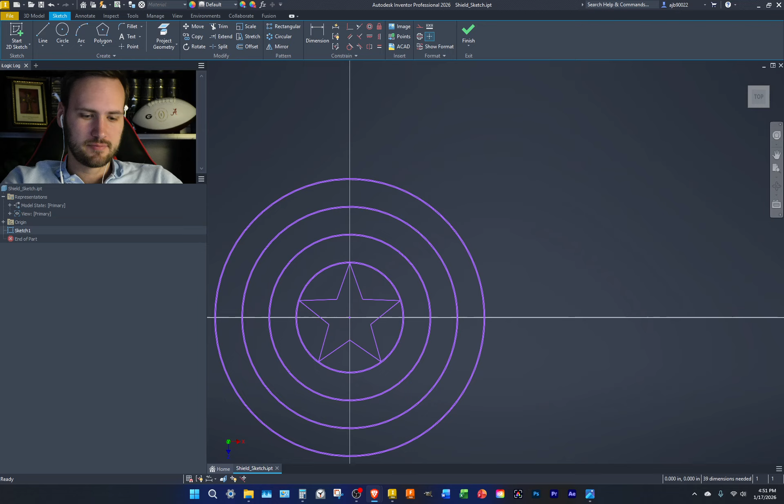Metal armor thickness. Let's see, I think metal chest armor thickness. So for historical reenactment, for modern ballistics, historical medieval armor typically range from 1 millimeter to 1.5 millimeters on average, with thicker sections up to 3 millimeters on the cuirass, chest plate, and helmet.

Let's see. How thick is a medieval buckler shield? Here's a good image of a buckler shield. Save image as, save that to the list. But now, how thick is it? Between 8 millimeters and 16 millimeters. Is that accurate? Doesn't sound too accurate. Let's see.

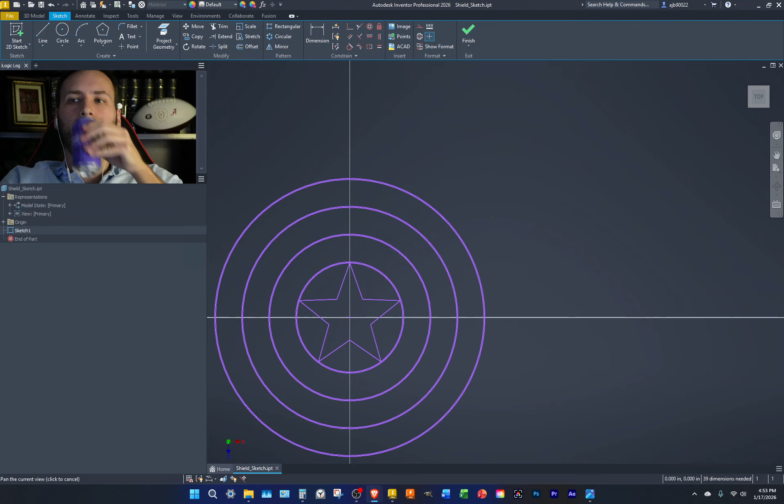Let's see, how thick was a metal buckler shield? Alright, couldn't have been much thicker, I don't think. Alright, so 1.2 to 2 millimeters in thickness. So about 16 to 14 gauge.

Let's see, millimeter to inches. So there's about 0.039 to 0.078. Let's see, what is gauge to inches?

All right, here, gauge inch to millimeter conversion chart. So let's see, was it 14 and 16? Yeah, 14 gauge to 16 gauge. This doesn't feel right, it's like the wrong gauge chart. All right.

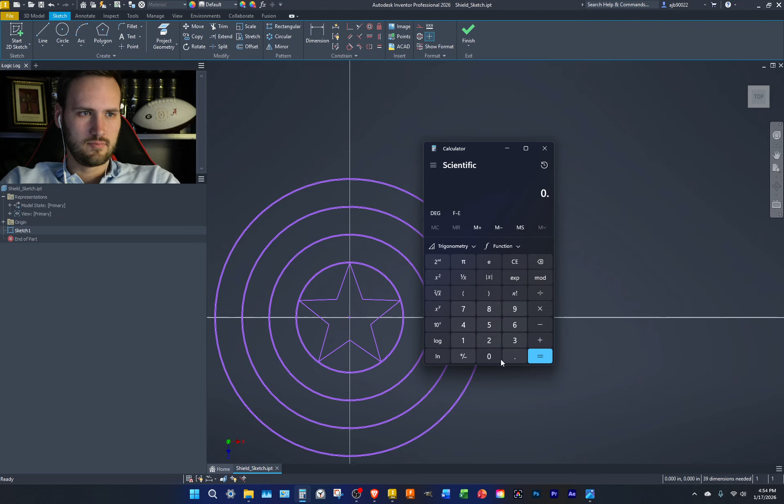Let's see, point oh, so see what is close to that. Okay, let's try this, I like doing things in eighths or sixteenths. So that's a sixteenth plus 0.015625, 0.078. Oh, that's pretty accurate to what 2 millimeters is, just under. All right, let's go with that thickness, 0.078125.

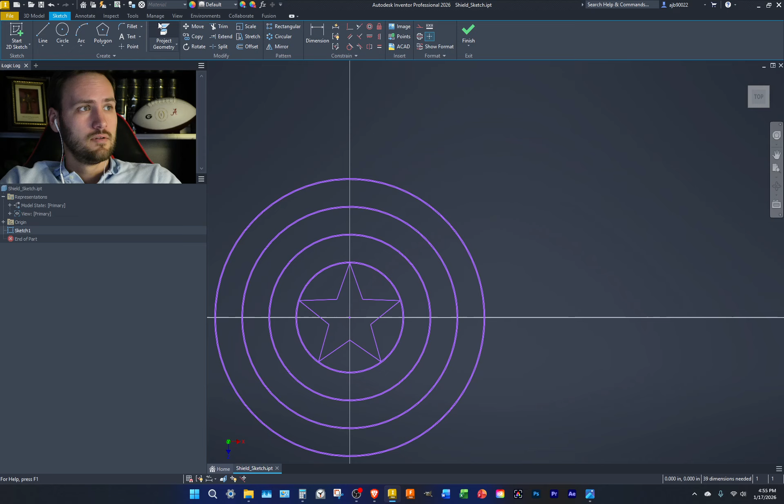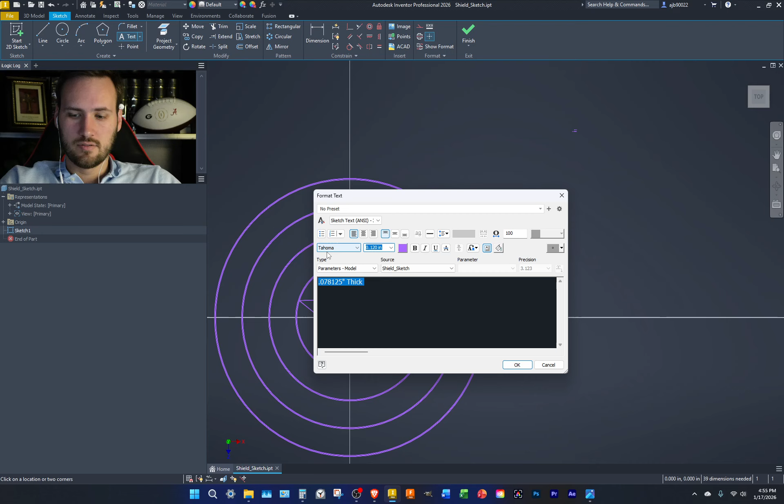All right, let's type this in. Inches. So that thick. Change this to 3. And of course it's upside down. Cancel. Escape. There we go.

All right, now let's see, so that means if you were to roll it, what does a cross section of rolled metal look like? Cross section of rolled steel, hammer rolled steel. I'm guessing because it's expanding and contracting at the same time, it's gonna get thinner. I don't know if I can find an image of that though.

Is there a cross section of steel armor? Must be someone who's cut it in half, right? Not what I'm looking for. I guess what I'm trying to do, I could show you all. Let's see, I'm trying to gauge this roll right here on the edges.

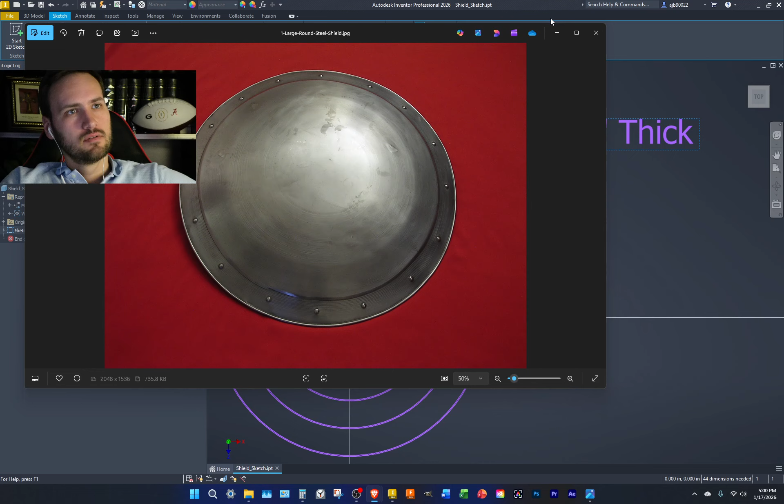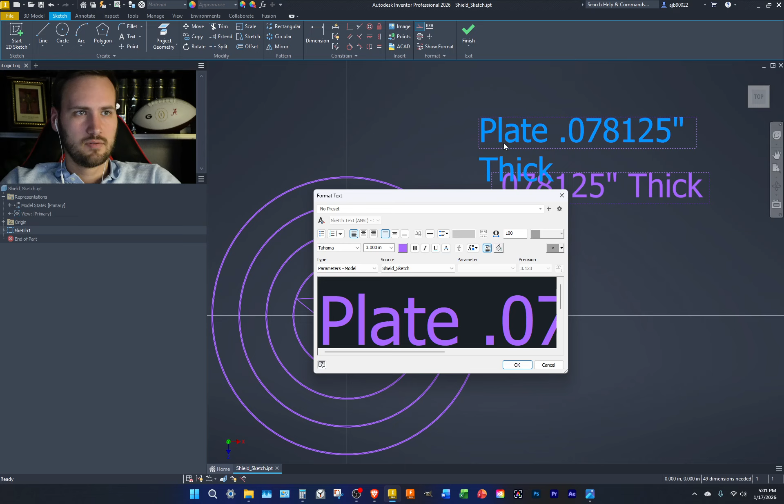All right, at least we have something to go with, so let's go with that. All right, where is it? Let's copy this. Okay, let's type in plate. Okay, I don't need to add 'thick' at the end, just do this. Okay, all right, plate is there.

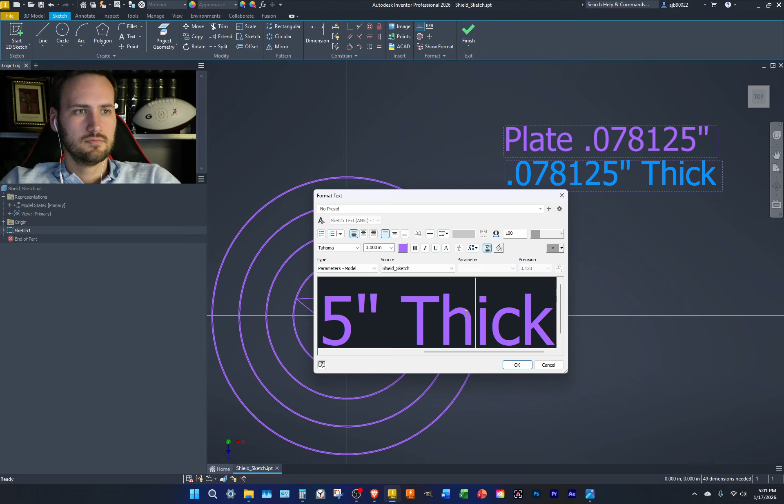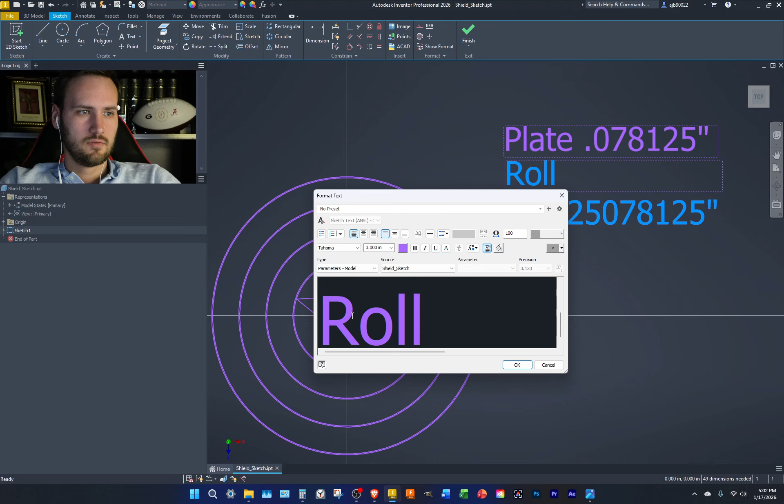All right, that means roll. All right, looks like we're gonna have to come up with something in between. Times 2. All right, 0.15625. Okay, well let's go ahead and add the 0. Okay, all right, so 2. Okay, plus 0.078125. 0.234375. Okay.

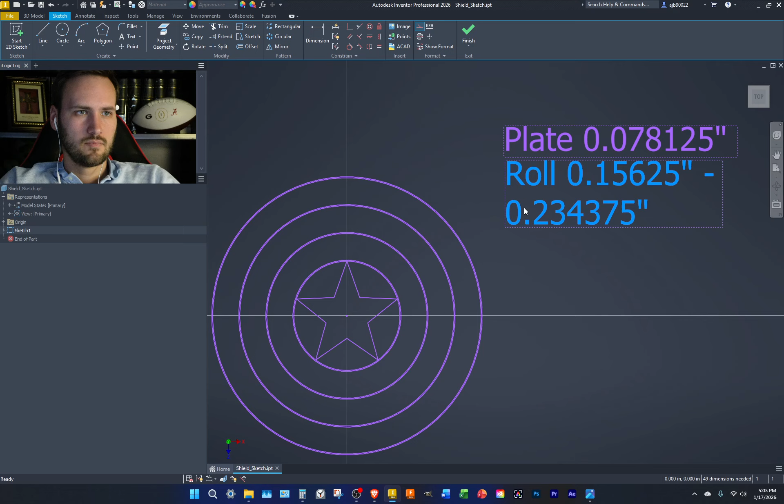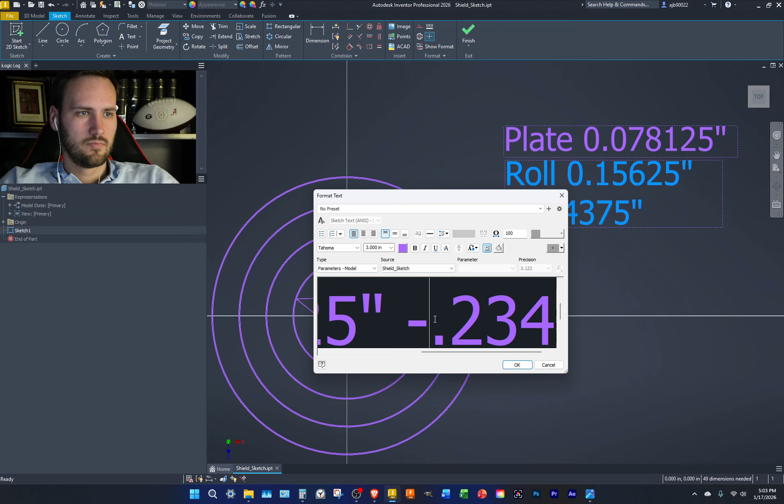Does that change anything? Nope. All right. Ah, come on, where's the 0?

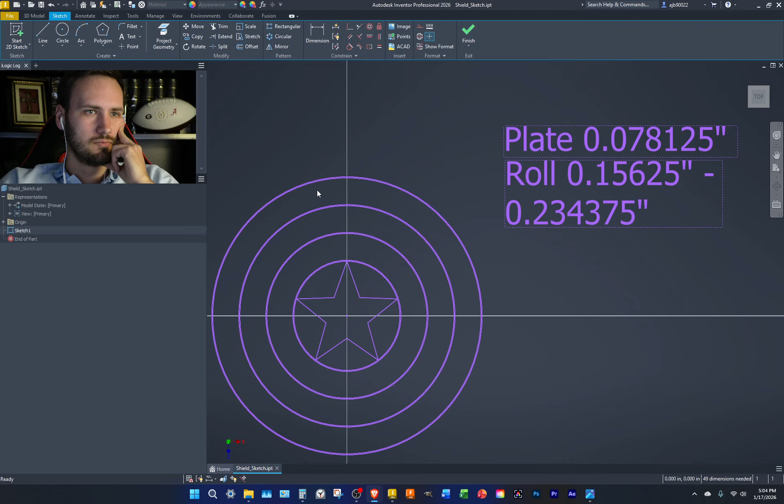So now we need to figure out the question of whether this would be overlaid shield after shield after shield, or a buckler shield and then strip of metal, strip of metal, strip of metal. You know what I mean? It's a question of what would be easier for them to do.

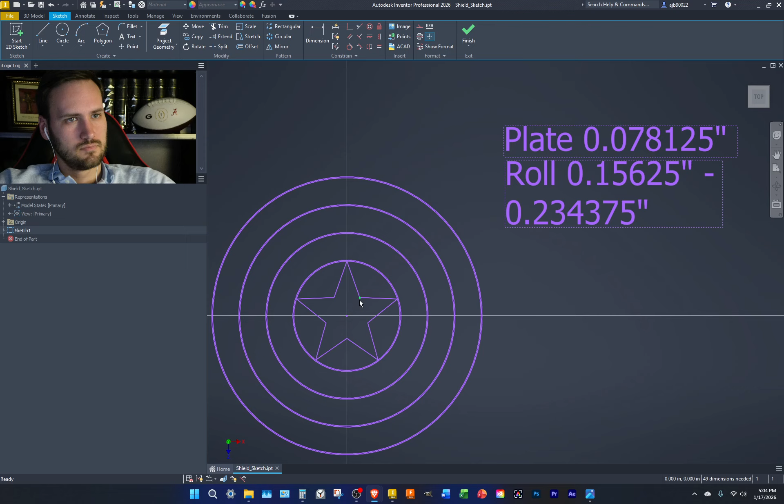I guess we could always do both and see which one looks better. All right, let's call that finished for now. Let's go ahead and work on the other plane. All right, let's hide this.

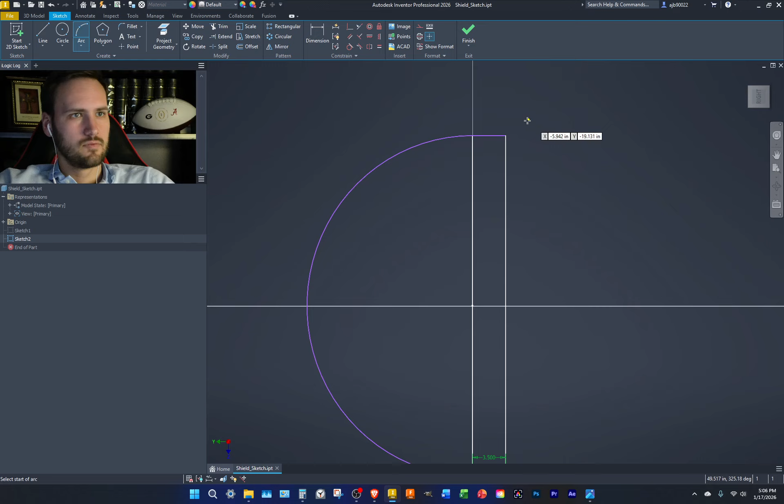Now we need to figure out how much of an arc we're not gonna have. I guess it could start off—this is the standard measure of what the rings are. So what if we tried making the thickness of the shield the same? That actually looks pretty good. So just as the rings are 3.5 inches thick, we make the actual shield curve at 3.5 inches. Actually, it looks good. What do y'all think?

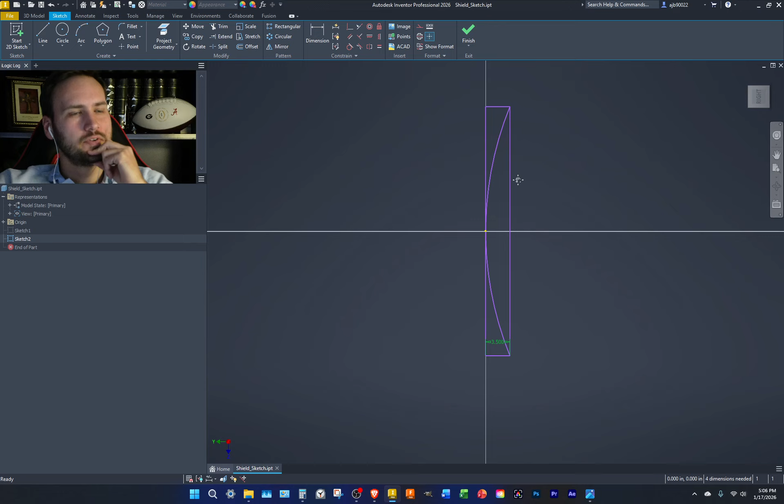I wonder if they actually use that measurement for the shield. So let's do this. Where's the center point? There.

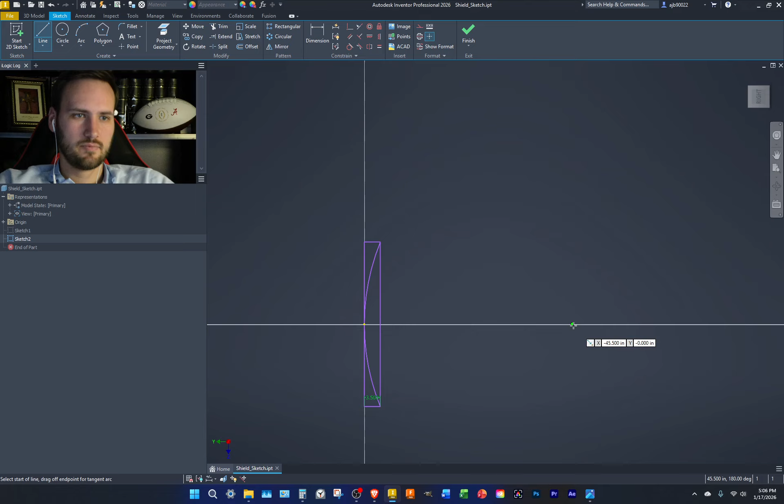The interesting part about this is, do we go— I guess we would go about that, we would say go, because we could do 3.5 inches in that direction and cut across. Or we could base it off of the degree. So what degree is this?

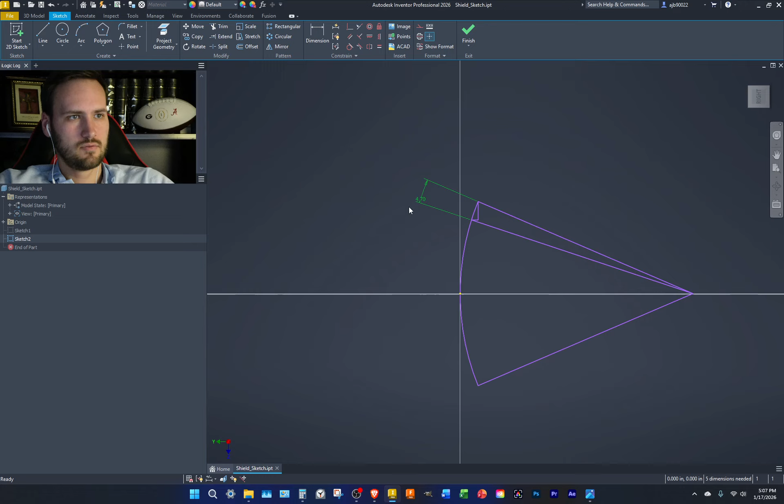Let's take this, go here. So this is 4.6, or basically 4.7. What is this, 45? This is almost 45. Which means we could do it this way instead.

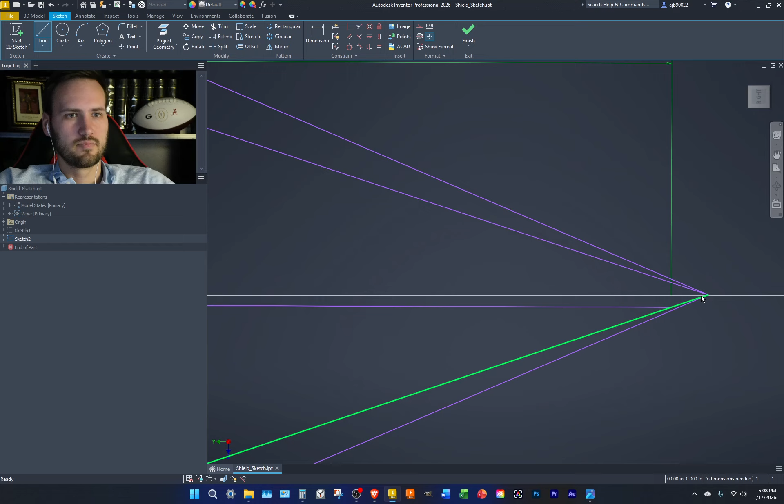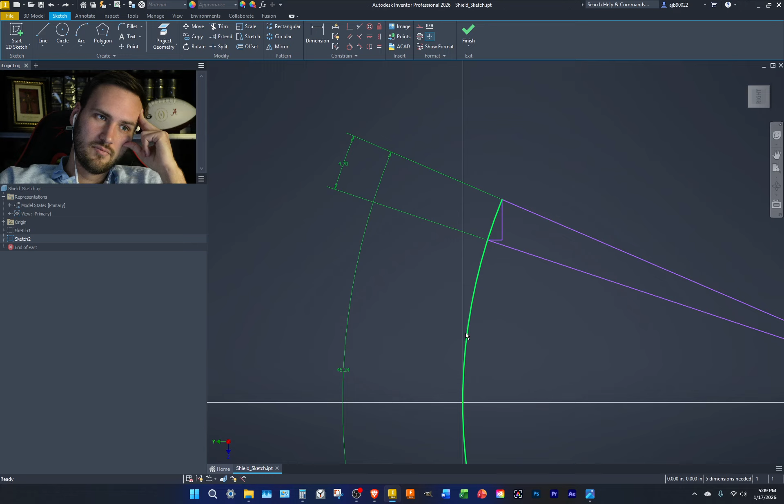Decisions, but this is an arbitrary number, I suppose. That's 45.24, that's interesting. So if we did— ah, crap, undo that. Because the interesting thing is if we go this way and step it how it's being done right now, each of these would technically be different heights, because the arc is shifting. It'd be small, but it'd still be different.

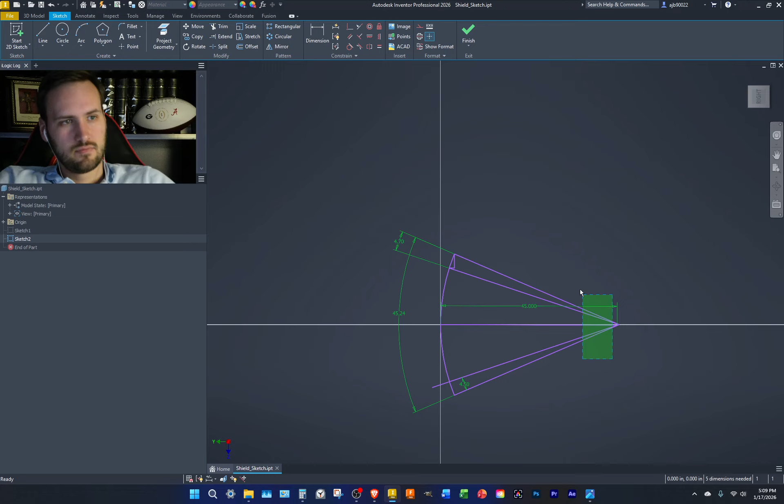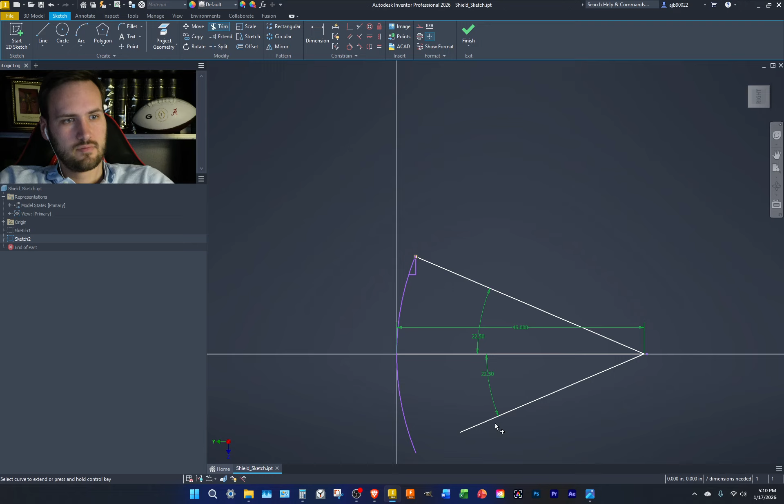So I'm kind of inclined to do it this way. Let's get rid of this, let's make that 45. Maybe it's 22.5—make that 22.5. There and there, so this should be 45 now, right? Whoops, let's go back in, go here. So yeah, so that's 45.

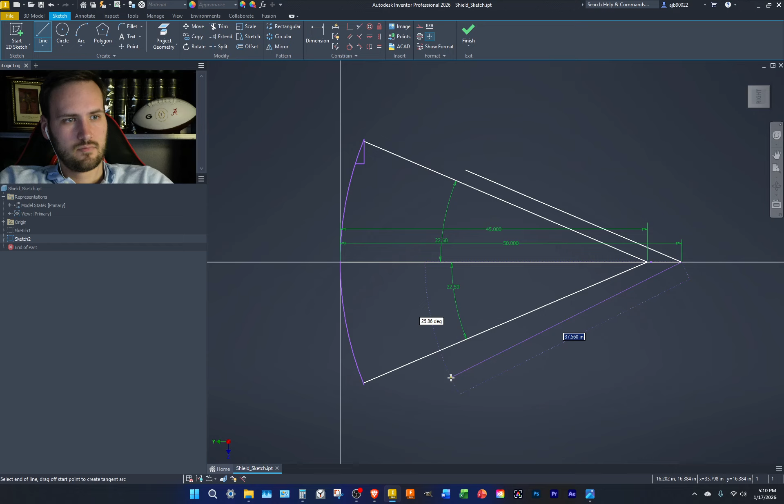All right, what happens if we make it go to 50? How big does the shield become? Really? Alright, take those two points—37. So we got a shield that's basically 38 inches, or a shield that's about 34.425.

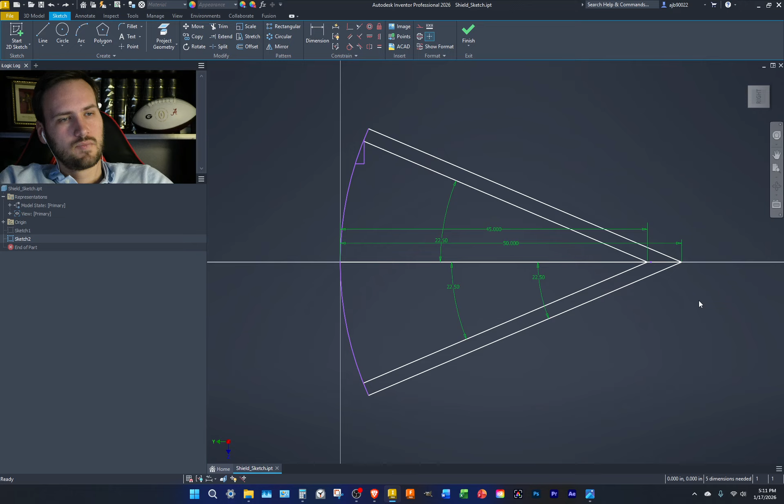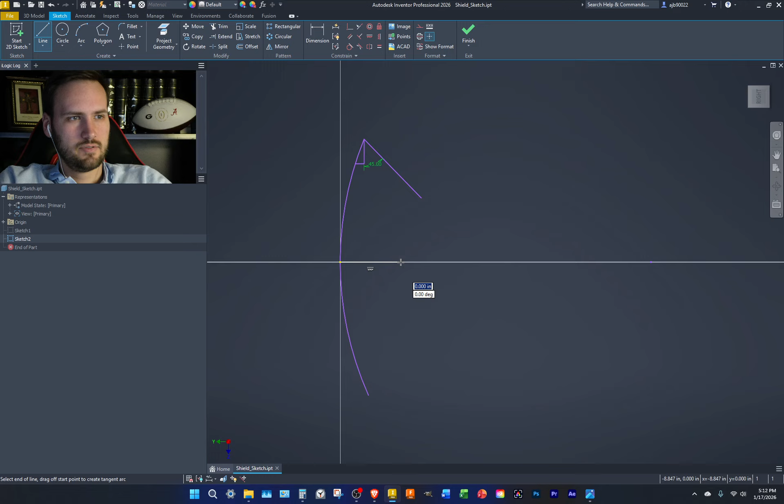I don't know which one I prefer, because we're no longer going to get a perfect 35 there then. Unless—get rid of that. What angle is this? It's like, so that's 45 there. So I'm guessing this is 35 now, right? So that's 35. Alright, I'm just gonna see what this would look like. It's 4.5.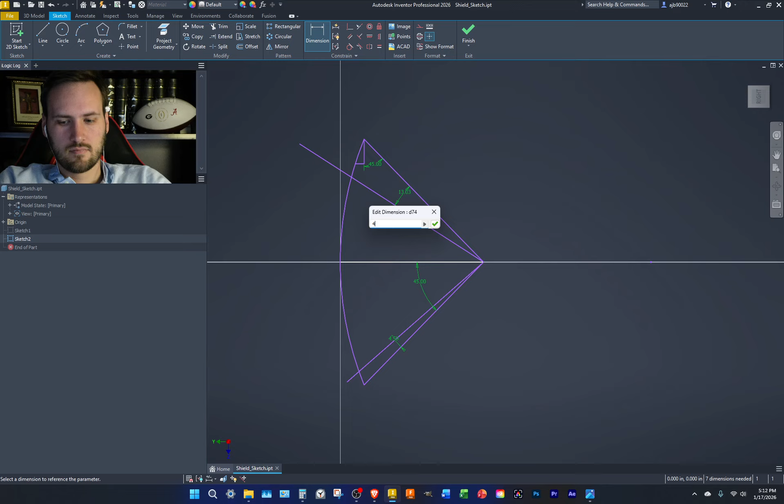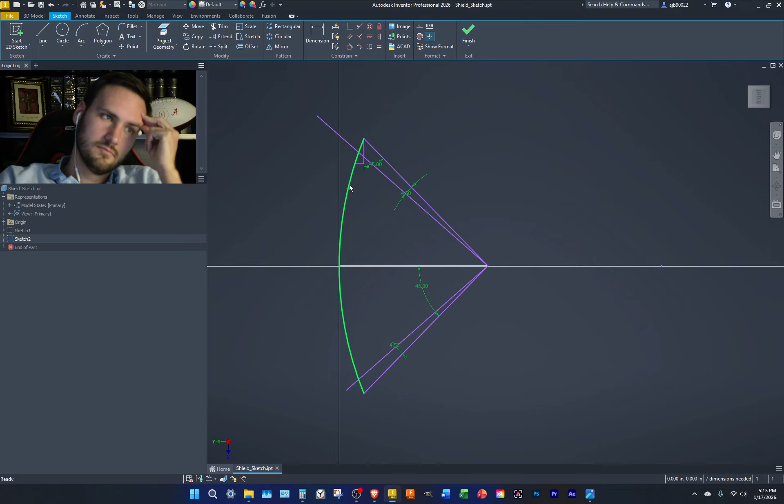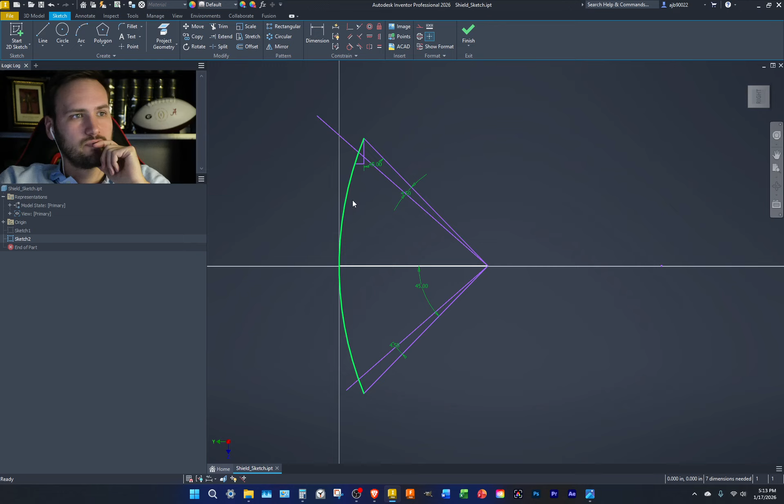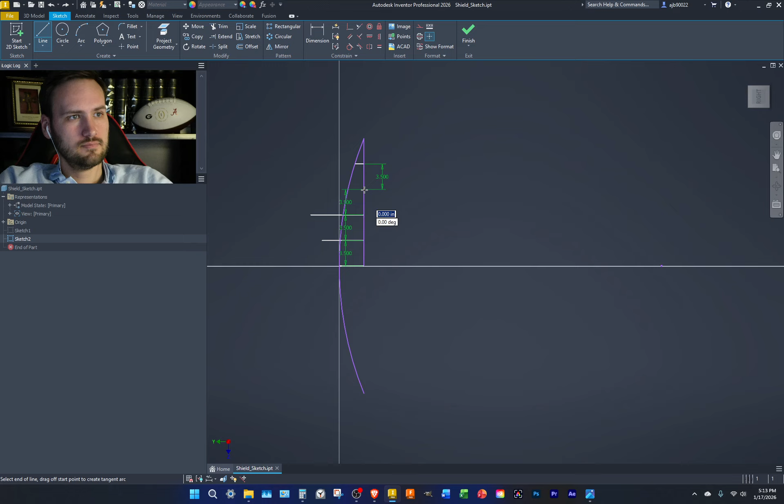Probably overthinking this, to be honest. I'm just not a fan of how— so let's go back to what we were doing before. So that's what's set up now. Problem is, technically, these aren't the same lengths. I guess it doesn't necessarily matter either, I guess.

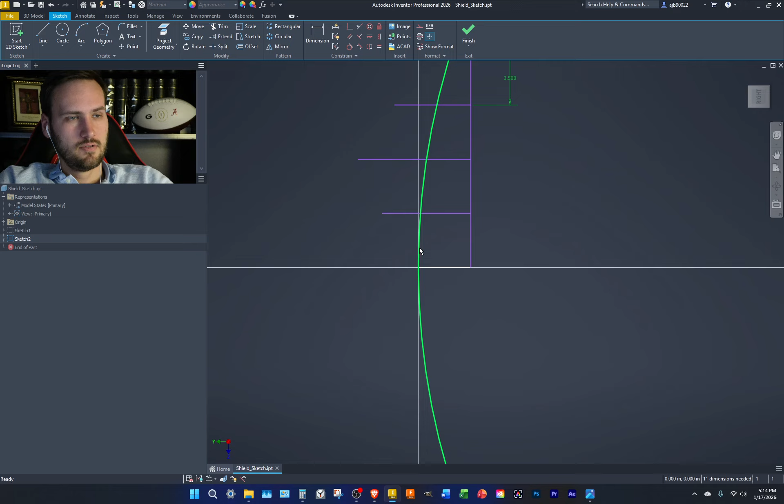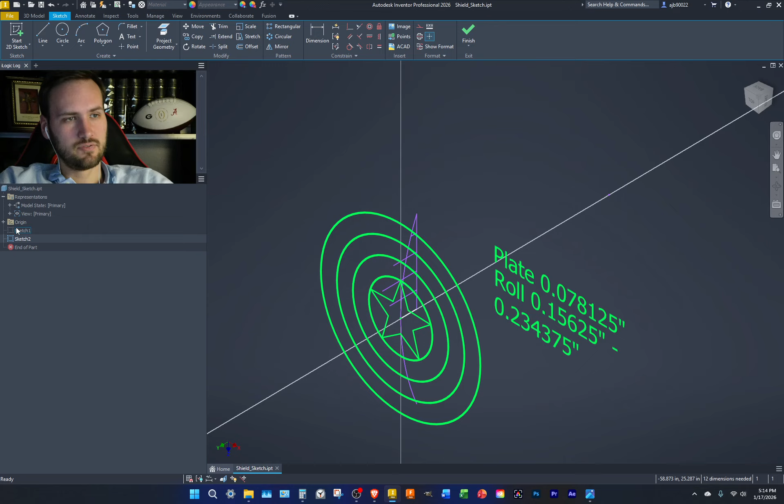Alright, let's just go with what we were going to do before. So what was the roll that we had listed before? Roll 0.15625. I think we do a roll of 3 times the initial, because that allows it to roll back into itself. So let's try that out.

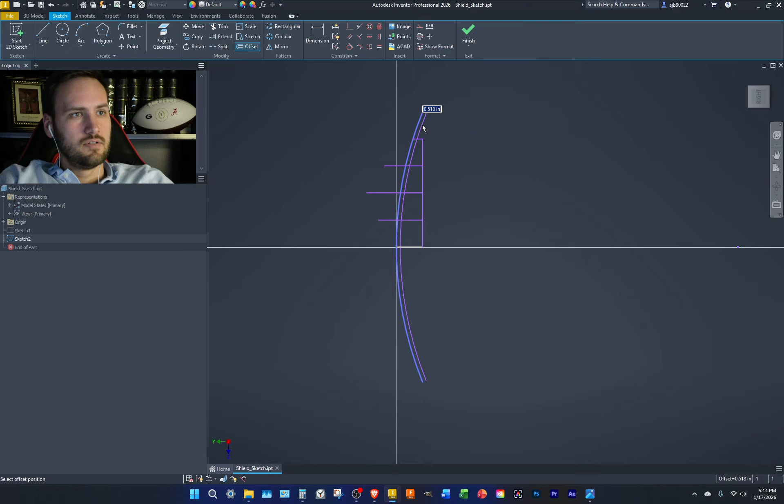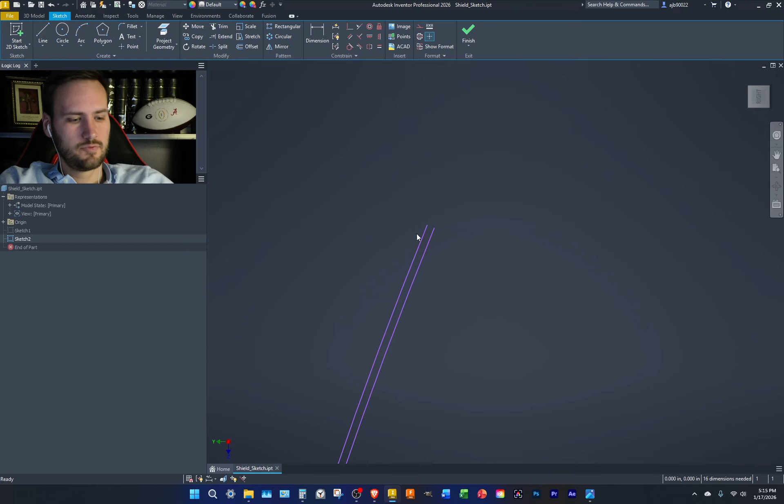So sticking to thickness, get rid of that. Let's do an offset of 0.078125. There we go. I guess. Take this, 0.078125. 0.078125. Take that, cap this here.

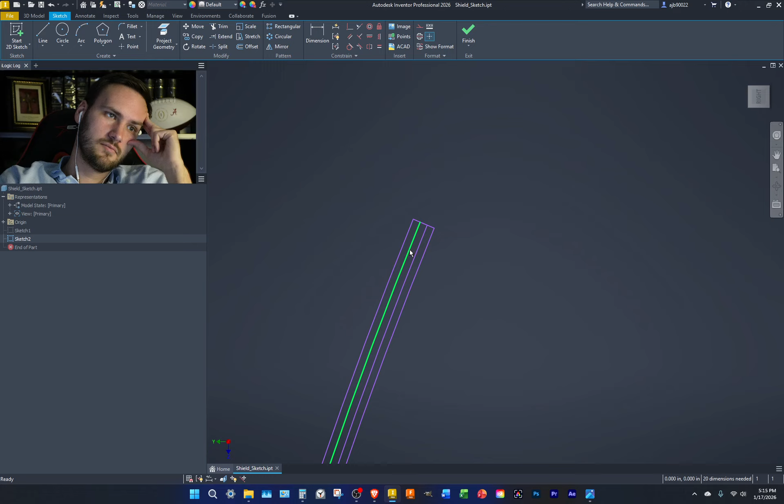So if this curves around, let's try this. I can't touch that, okay. So it's gonna have to go from a bigger circle to a smaller circle. So what is this? Not what I want to do. 0.15625—so if I fill this to 0.15625, there. I'm gonna have to offset this then.

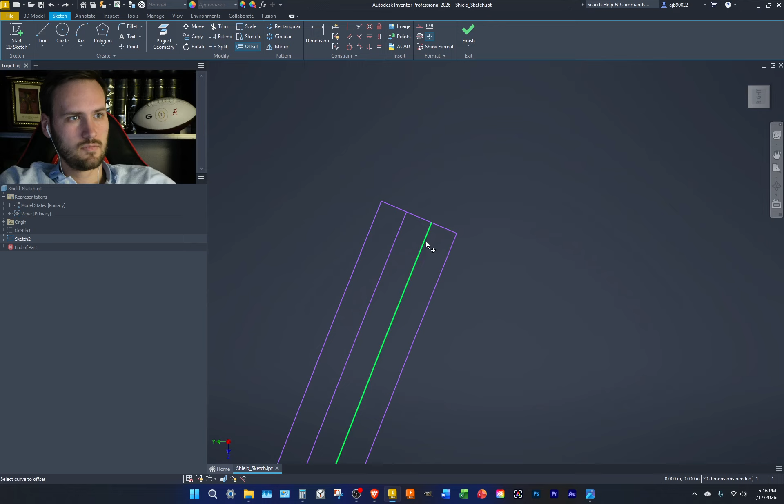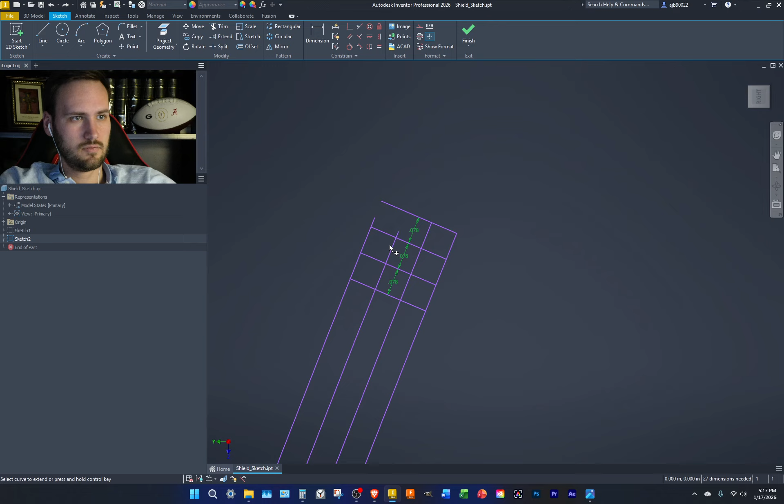Got that, 0.078125, 0.078125. Okay, now let's fix what we did, what I wanted to do. Okay, there's a grid, so now let's roll this edge. What is 0.15625? Okay, so it's just half of that. 5. There we go.

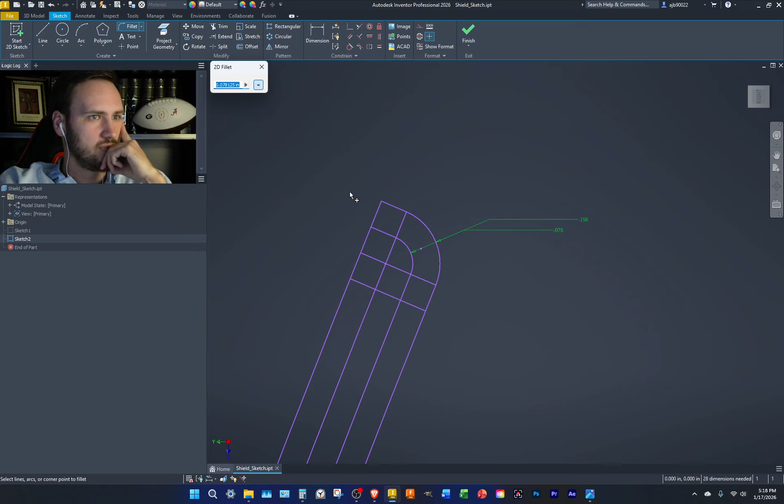I think we do the same here, right? Now it doesn't look good yet, so I can come back around. So does it need to be offset once more? Okay, let's get rid of this, don't need it, don't need that. So this is the original. Extend, cut, cut.

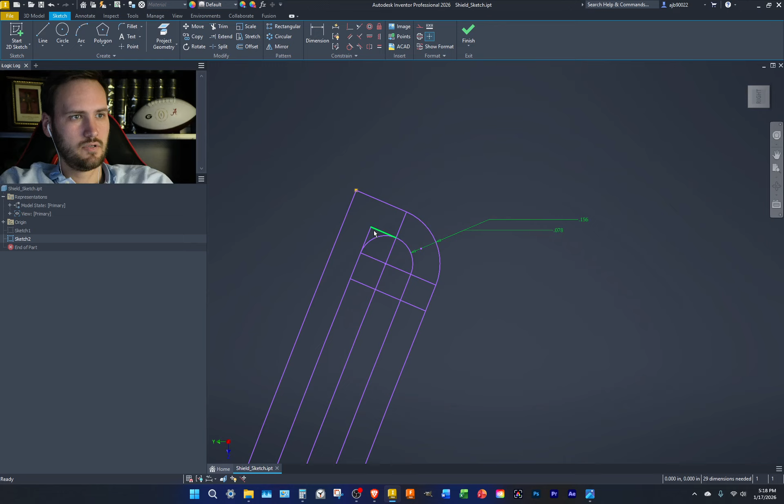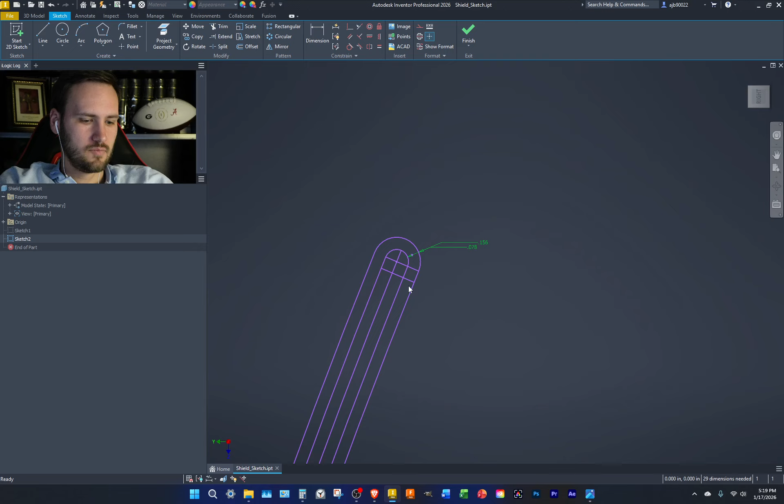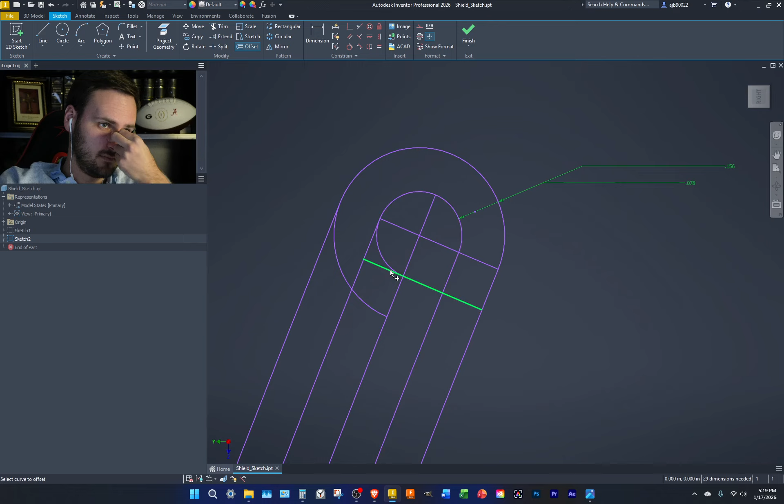Okay, get rid of this. Oh. There we go. Now this is about 4 times bigger though. Let's see. So it's gonna need to get tighter here.

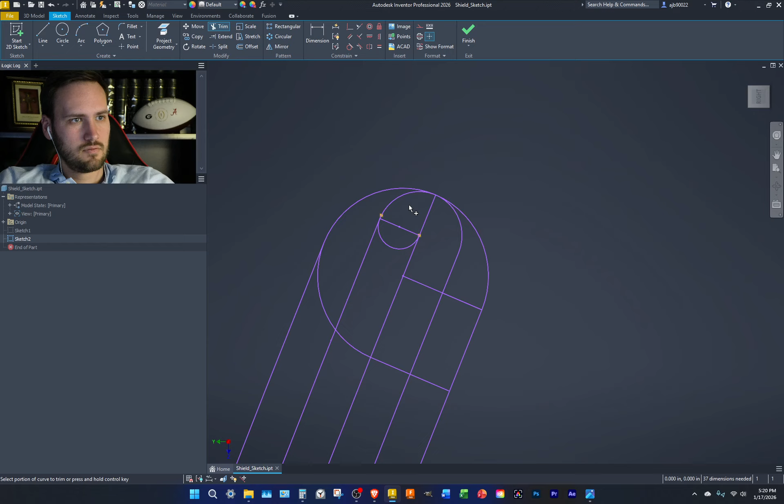Oh, so it's gonna have to get tighter here, that's what needs to happen, I think. So it needs to be cut. Whoops. There we go. Why is that breaking? Is it this? Okay.

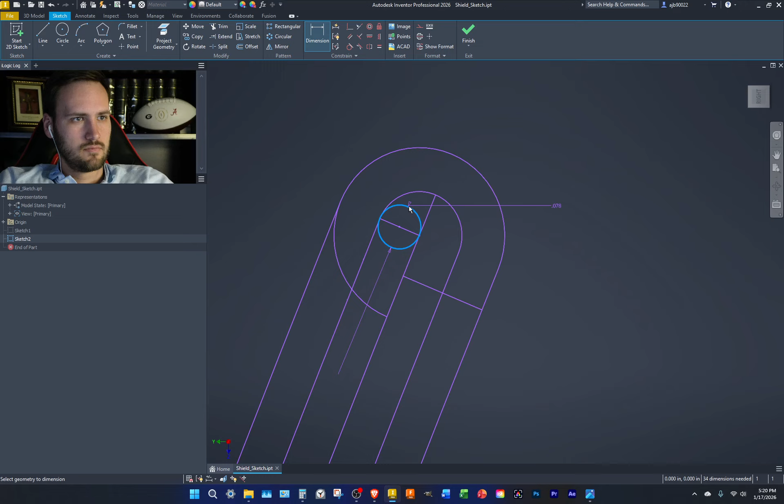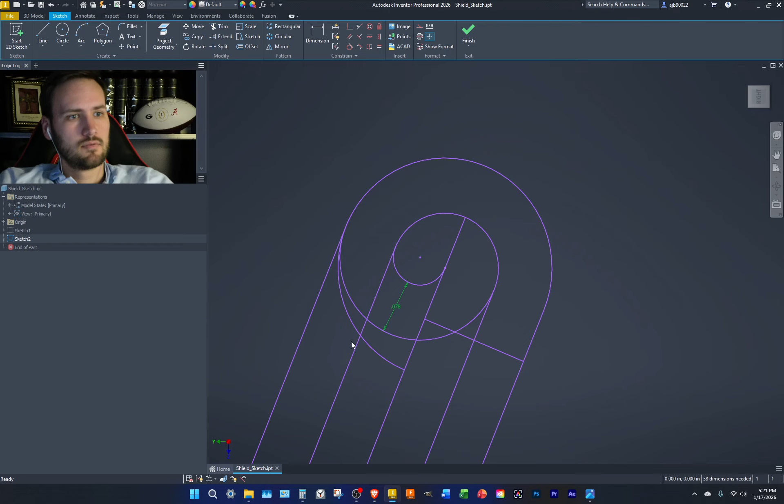Get rid of that, get rid of this. Alright, can get rid of that and this. There we go, okay. See how constraints can screw you up a bit. So let's offset this real quick. Let's get rid of this. Get rid of that point.

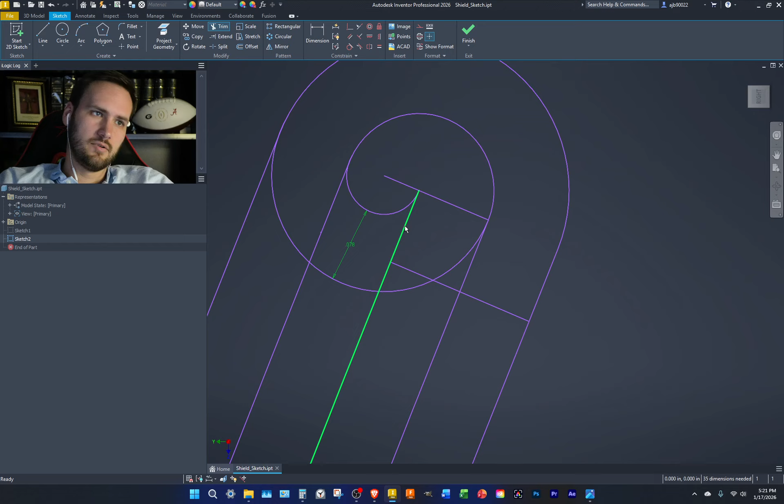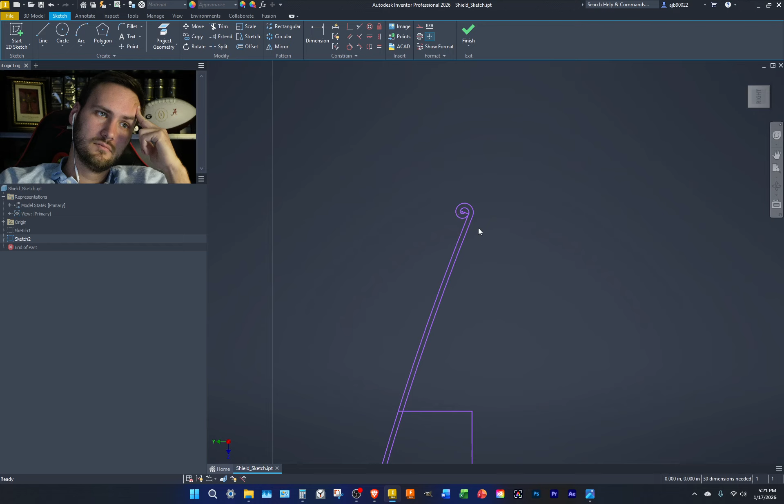And then let's go ahead and cut that off. Get rid of this, get rid of that. And there's our basic rolled edge. I think that should be good enough, so let's pretty that up so we don't have a little yin yang right there.

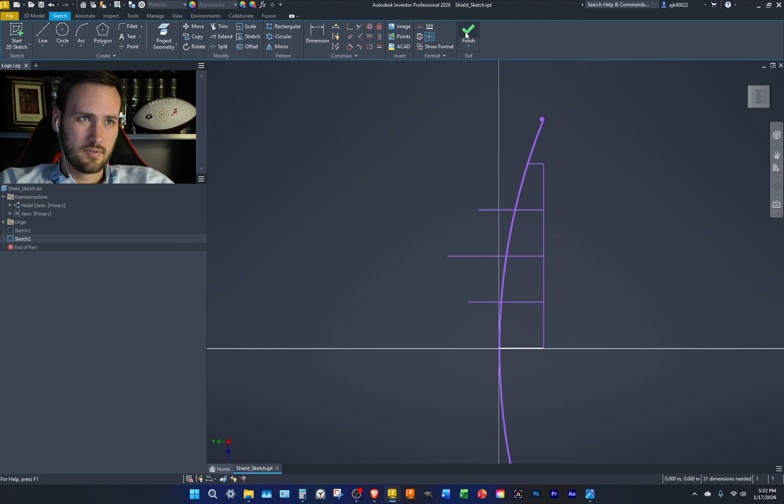So that should look pretty good when it's turned. So now we'll leave it there for now so that when we come back we can start working on the rest of it. But I'll leave that there and I'll catch you on the next video, all right?